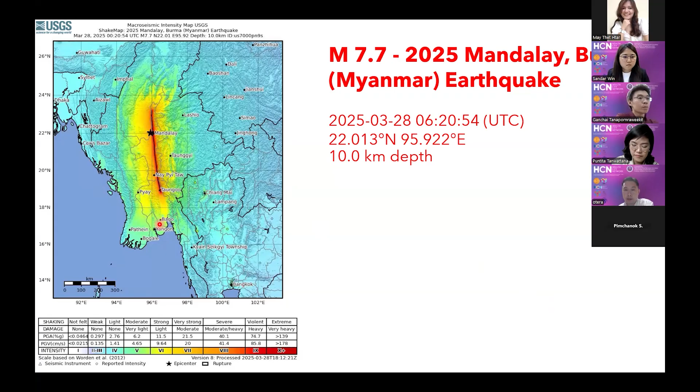We know it's going to make a major earthquake. If we look back in history - this is upside down, this side is north, this side is south - this is the Sagaing Fault. It passes through Mandalay, Naypyidaw, and Bago, many major cities in Myanmar.

This is the time scale. In 1930 there was a 7.2 magnitude earthquake, and then 7.3 again in 1930. Actually these two earthquakes are quite strange because the first one occurred in May 1930, and the second occurred in December 1930.

From history, after we could record earthquake magnitude, we know there was one in 1956 at 7.1, in 1946 at 7.7, and 1946 at 7.3. But this part has been quiet for so long.

Before the introduction of earthquake magnitude measurement, historical records say there was a big earthquake in 1839. And it stayed quiet until last month, 28 March 2025, when it finally came at magnitude 7.7.

So we call it a seismic gap. A seismic gap means we know that part has been quiet for some time. From the side, we know that mostly earthquakes on the Sagaing Fault with magnitude greater than 7.5 would have a recurrence interval of about 100 to 200 years.

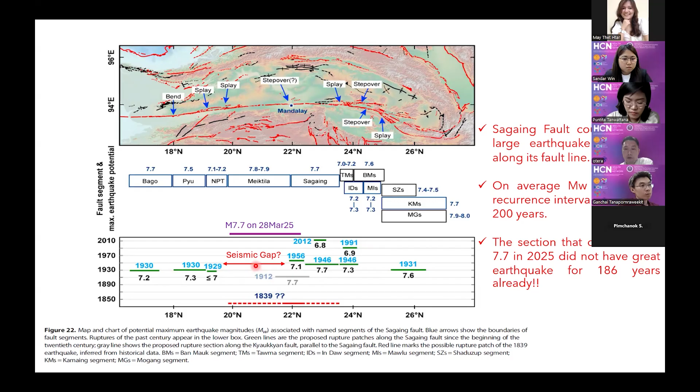Actually, the surprising thing about this earthquake is that the rupture is really long, from Mandalay to Naypyidaw, passing through two major cities, about 500 kilometers, which is quite long - longer than a typical 7.7 earthquake.

1g is like when we're sitting on the table - that's 1g downward, but now it's 1g upward. So it means people would have been thrown up into the sky because it's very strong.

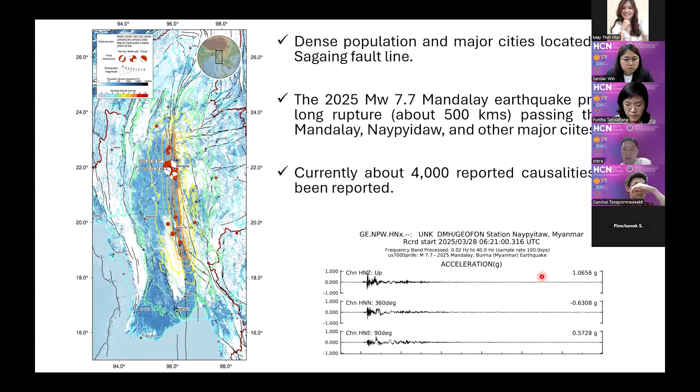Now we come back to Thailand and Bangkok. What you see on the screen - the triangles are seismic stations that we have in Thailand, and this is the one in Bangkok.

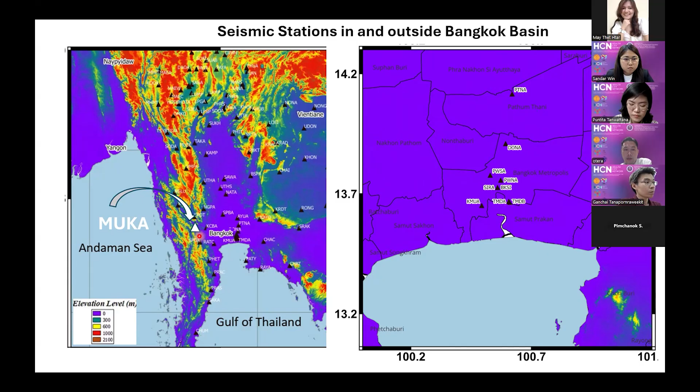Most of the time we're talking about whether Bangkok really amplifies the ground motion or not, as Dr. Ganchai mentioned. So I'd like to compare. We have one station in Kanchanaburi, shown as the white triangle. The top one is the ground motion recorded in Kanchanaburi, which is much closer to the earthquake. This one is in Bangkok.

You can see the amplitude scale is the same. In Kanchanaburi, even though it's closer to the earthquake, the magnitude is just 0.006 G. But for Bangkok, it's amplified to 0.02 G. So it actually amplifies the ground motion.

People in Bangkok, even though we're farther from the earthquake than Kanchanaburi, would feel it much larger. Another interesting point is the significant duration - how long the ground motion lasts. In Kanchanaburi it's just 40 seconds, but in Bangkok this scale is 150 seconds. So not only do we feel it stronger, we also feel it longer.

So the amplification in Bangkok Basin is about 3 times, and the duration is also about 4 times, because the subsoil doesn't only amplify the amplitude but also amplify the duration. People on the ground would feel it for about 3 minutes, but people in tall buildings would feel it for more than 3 minutes. So this is what people actually felt on Friday, 28 March.

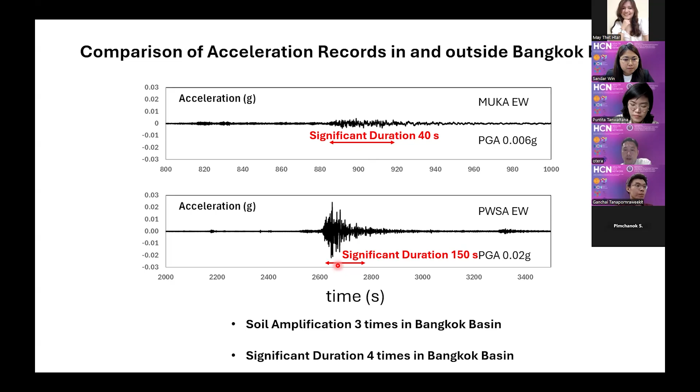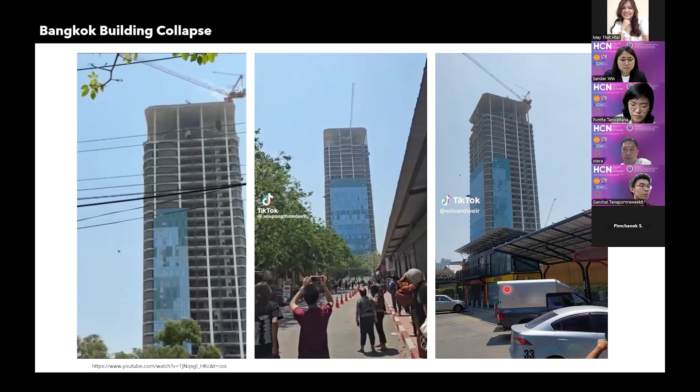I don't want to play this video again, but most people already see this building collapse. I'd like to say one positive thing: considering the earthquake is really large, only one building collapsed, and that building was under construction. There's still major investigation into the cause, but in many other parts, buildings are still fine.

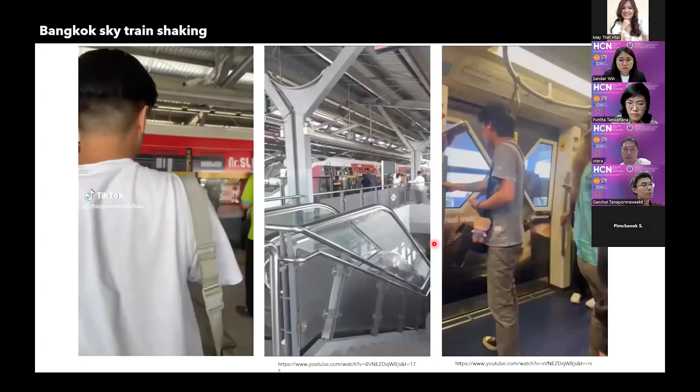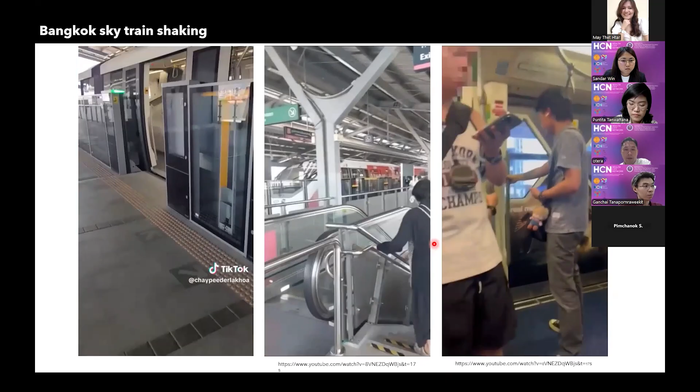The Bangkok Skytrain shaking is the first time people really saw this. We have been telling the authorities for many years that this could happen, but the scenario seemed too hard to believe, so most people still don't quite believe what they're seeing.

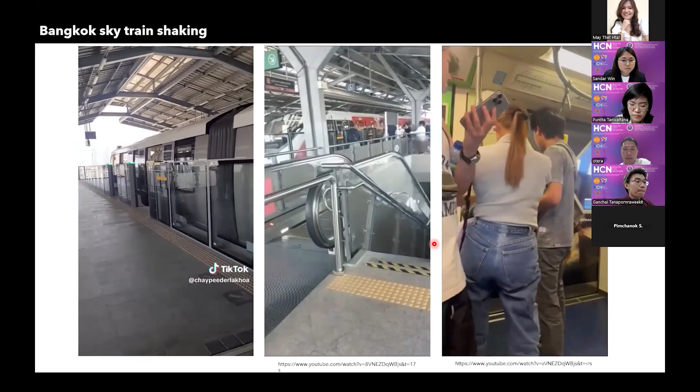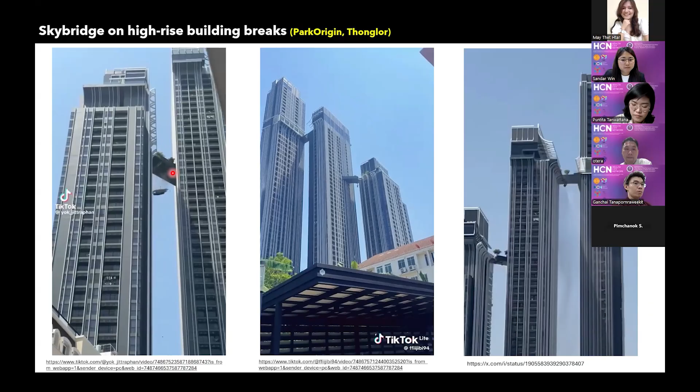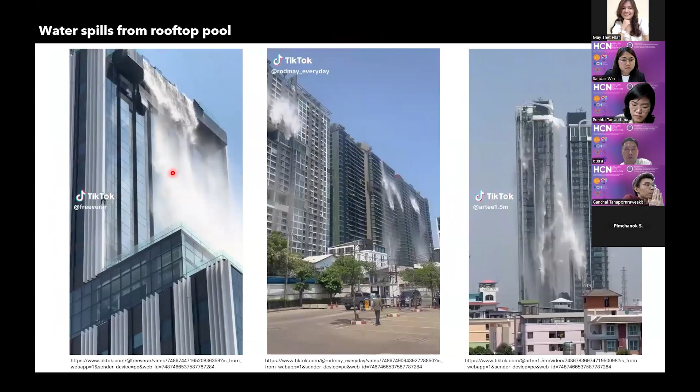People in Bangkok felt many things, like the highway shaking. This caused traffic congestion afterward due to the stop of the Skytrain and the stop of public transportation like the subway also. So on Friday, everybody saw people moving on the street to go back home.

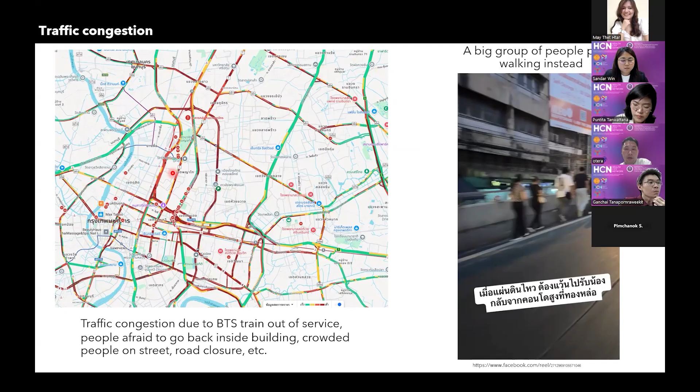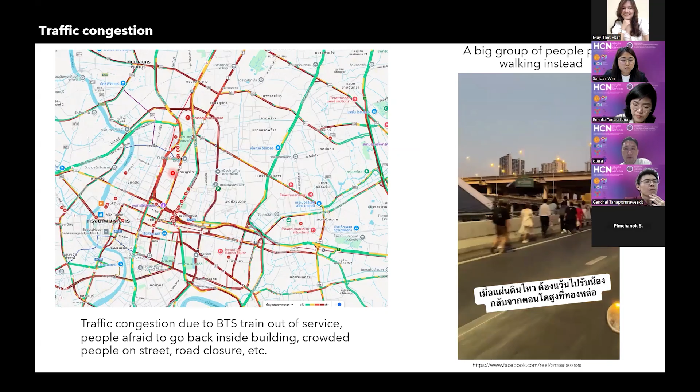Even though this happened, we still need to think that we were quite lucky that only one building collapsed.

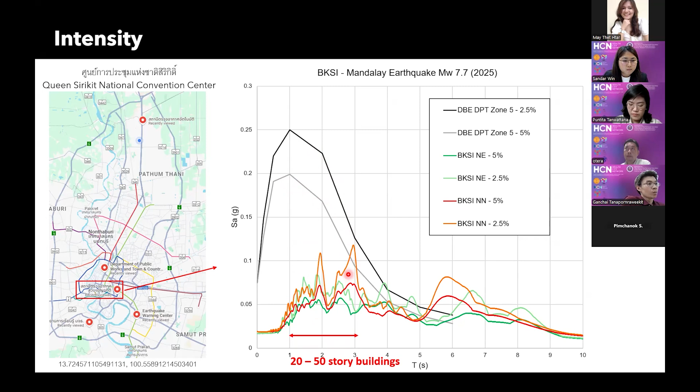And then this is the observed spectrum from other different locations.

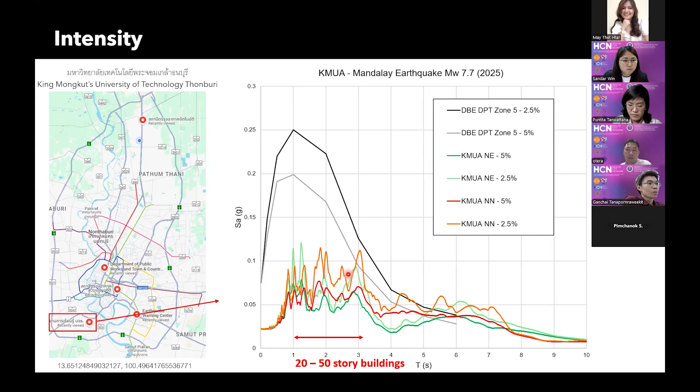After the earthquake, we did site investigations, and we separate the earthquake-affected buildings into green, yellow, and red categories.

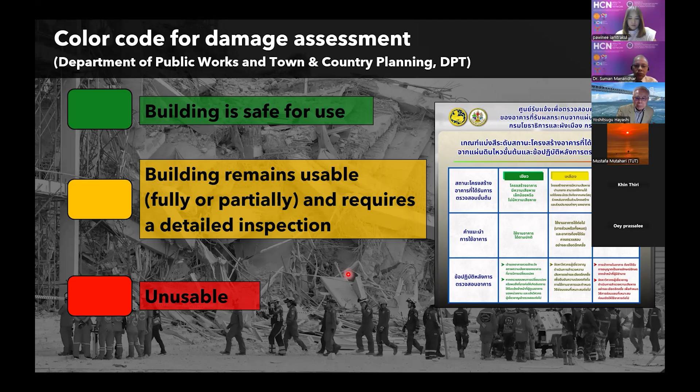We are still in the process of investigating how many buildings are red, yellow, or green. Right now, most buildings, almost 500, are still green, 42 buildings are yellow, and 2 buildings are red. So this is what we have right now.

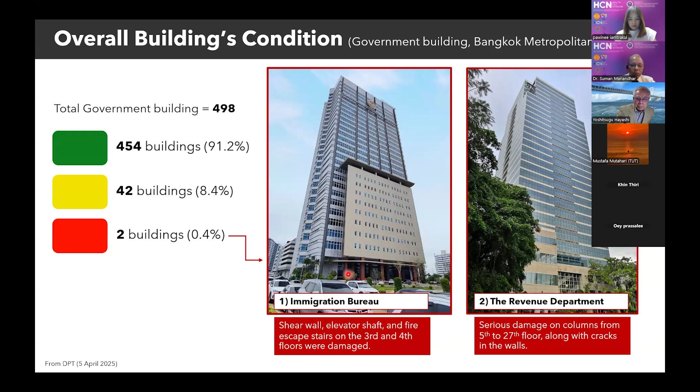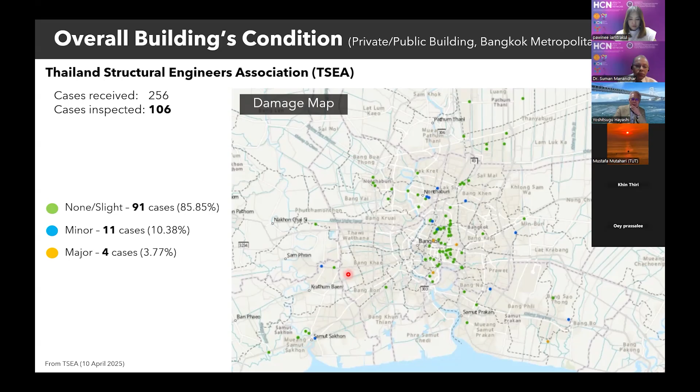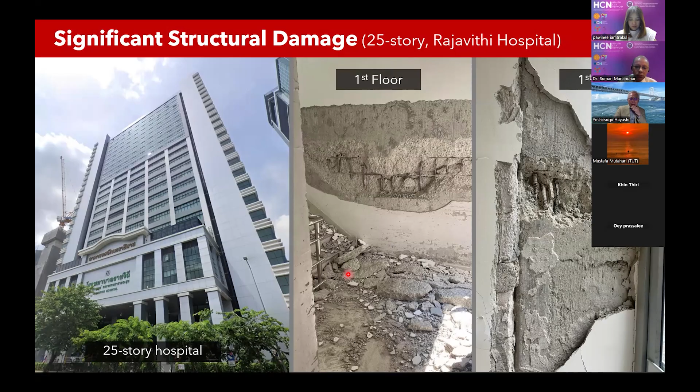This is an example of a red building, a 25-story hospital building. On the first floor, you can see the shear wall damage due to the earthquake. This building was built about 20 years ago, so the seismic design standard was still not quite good, and this is some significant structural damage for the hospital. This hospital needs to be closed and some retrofit work needs to be done.

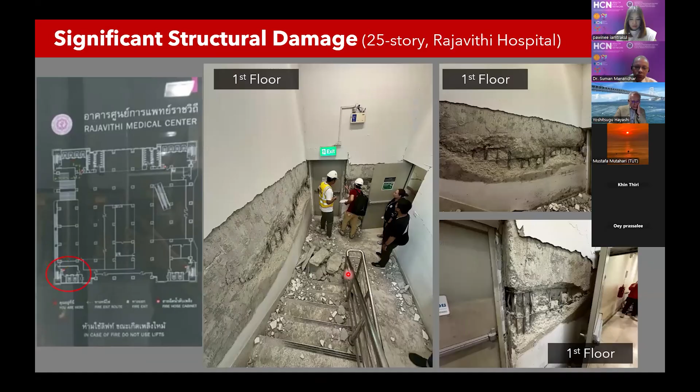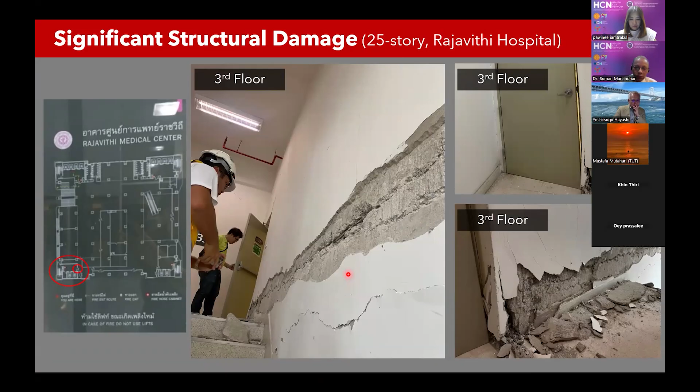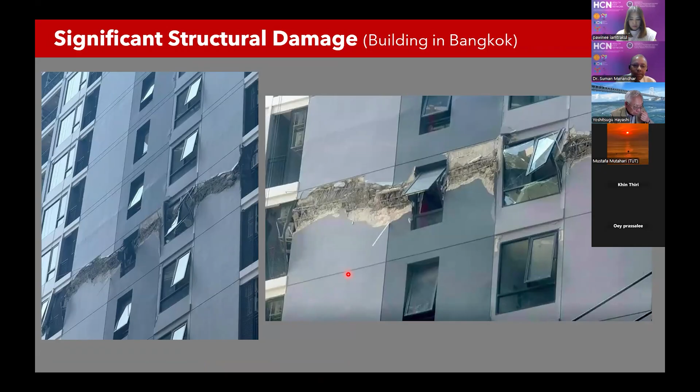Some more photos of this building. Mostly we observed damage on the 3rd floor and 1st floor because the base shear is very high in that location. I'm not going to go through all the structural damage, just showing what we observed, so I won't take too long.

In summary and conclusion: the Bangkok basin amplifies both amplitude and duration compared to locations outside the basin. The seismic design spectrum we recommend is still higher than what was observed in Bangkok. High spectral acceleration could be observed at low damping, like 2.5% or 1%, which is a major concern for tall buildings.

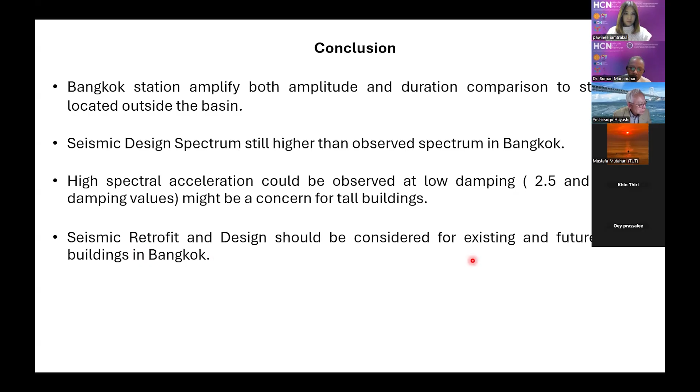So we learned a lot, and we're learning a lot from this earthquake also. We're sure we're going to come up with a new seismic design standard with all the new information we have here. What we recommend for the future is that seismic retrofit and design should be considered for existing and future tall buildings in Bangkok. That would be all for me.